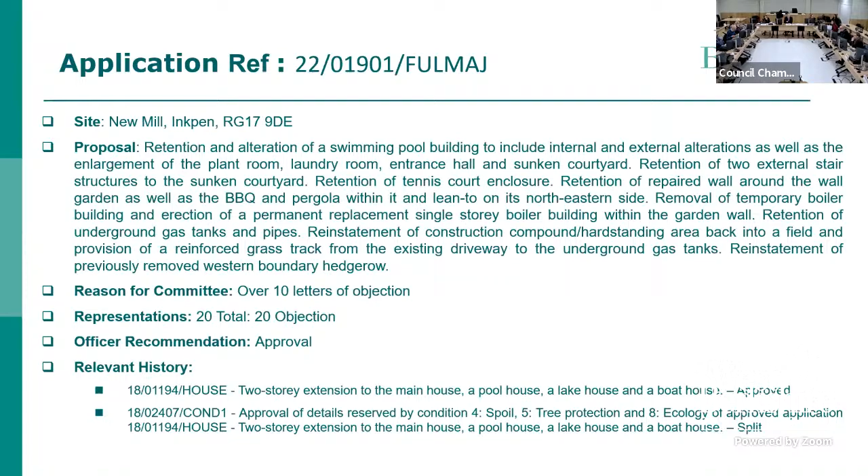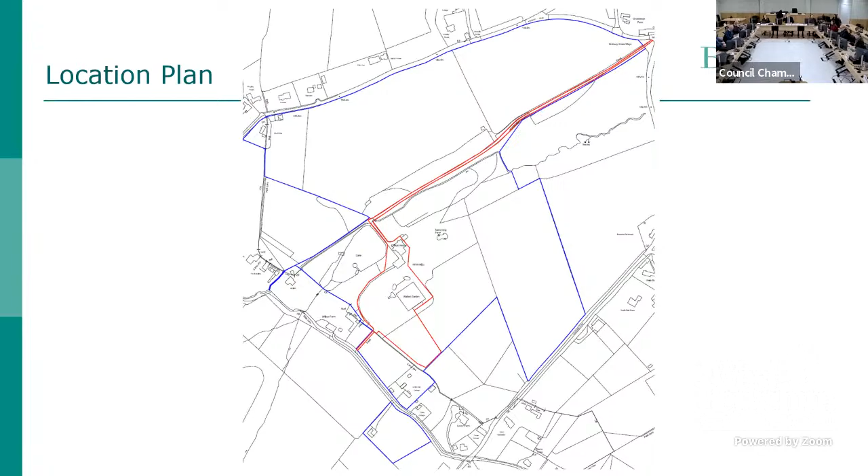I'm going to split it up into sections just so it's a bit easier because it's quite a long proposal. On the screen, we have the location plan from the area. The applicant owns all of everything in the blue line. However, we're only considering the items in the red, which include the access to the north.

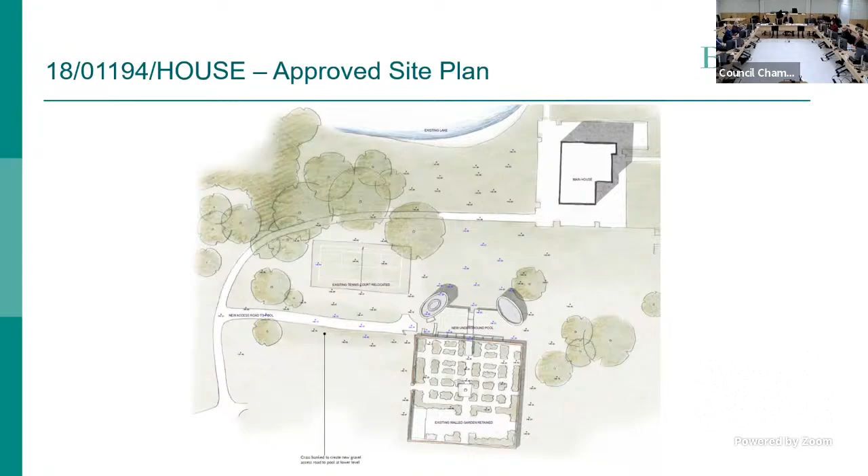This was the superseded site plan. So following concerns raised by neighbouring dwellings regarding ongoing sheet piling works for the access ramp that was previously approved, that's in red, this element was removed due to complaints received about the sheet piling and the noise volume and the issues that causes. This was voluntarily removed by the applicant, and amended plans were received on the 24th of October, which removes the ramp and it remains as is, as a sunken courtyard.

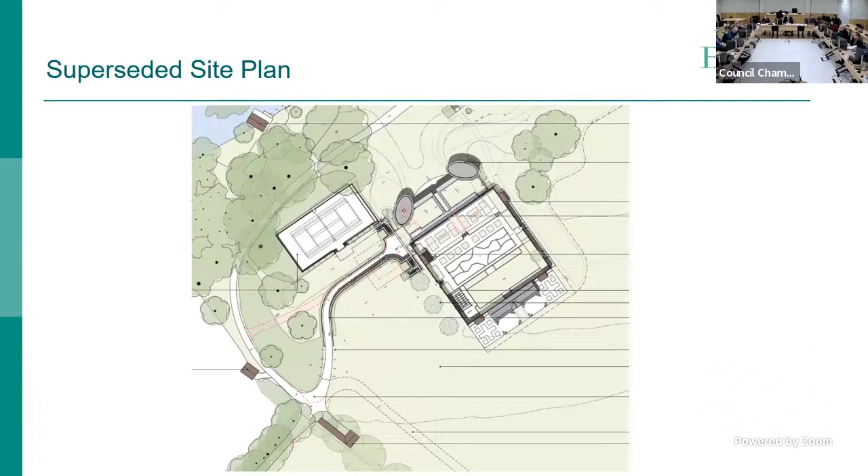So the first element is the retention and alteration of the swimming pool building to include internal and external alterations, as well as the enlargement of the plant room, laundry room, entrance hall, and sunken courtyard. The underground pool building was approved under a previous application. However, changes were made during construction, which this application seeks to regularize. The majority of the plan changes proposed to be retained are reorganizations of the room underneath the walled garden.

These are not visible from anywhere on the site surrounding and result from the enlargement of the total internal area of underground rooms by approximately 10%. This is for increased plant provision.

However, some of the windows from the approved design were not constructed, and therefore this application also seeks approval for them as constructed. Ms. Kirby, does your mouse work on the screen? You might just do a circular movement of the 10% and the increased bit, so other people who might not be quite familiar with reading drawings can follow. Thank you, that's fine.

So the previously approved floor plan is the red, if you can see that online, which is this sort of area. So this area to the right-hand side of the screen, that's all been removed, and the sunken courtyard has been extended for the plant rooms.

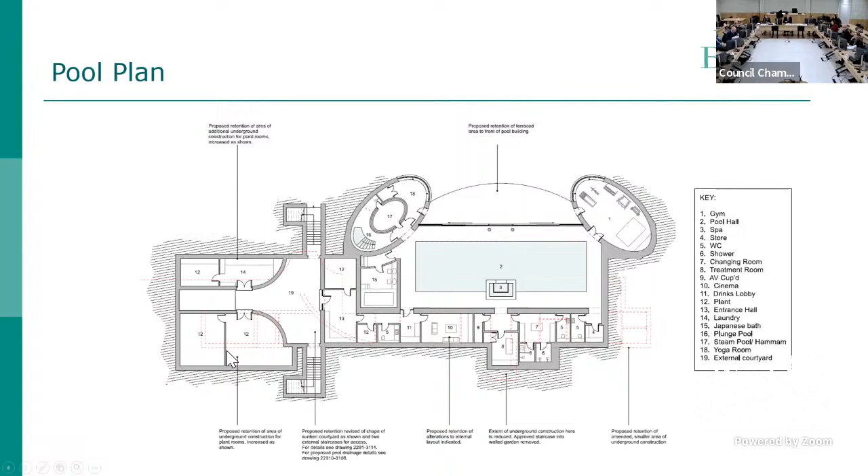So we have some of the elevational changes. This is the main elevation that's seen from the north. Again, some of the windows were not constructed. However, the majority of the plan changes proposed to be retained are internal and again, not visible. The rooms that are visible from the principal elevation are unchanged in size from the original permission. One of the main changes was the removal of the stepped access and glass link into the walled garden, which is situated on the roof.

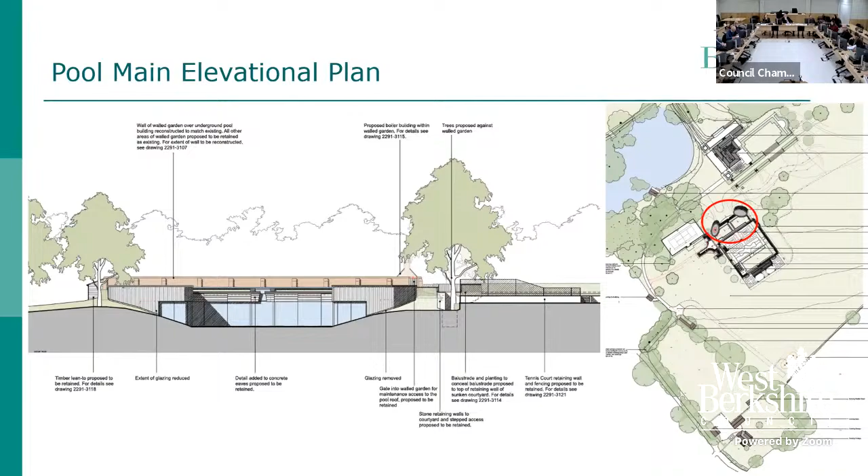So you can see on this plan here. Instead, two external staircases were constructed into the widened sunken courtyard to the west. To the left of the screen, we have a staircase to the north and a staircase to the south. These were constructed. This area here was originally going to be the ramp that goes to the west. However, it's now proposed to be retained as just a courtyard.

So the roof lights in the grass roof of the building are reduced in size and number, and the material finish of the rounded roofs is proposed to be amended from gravel to single ply membrane. There's also a slight level change proposed within the walled garden to allow for increased depth of soil for planting of fruit trees. These are over the proposed underground rooms, to maintain similar planting within the walled garden. So that's within this bottom area out here, that will be the level changes within the walled garden.

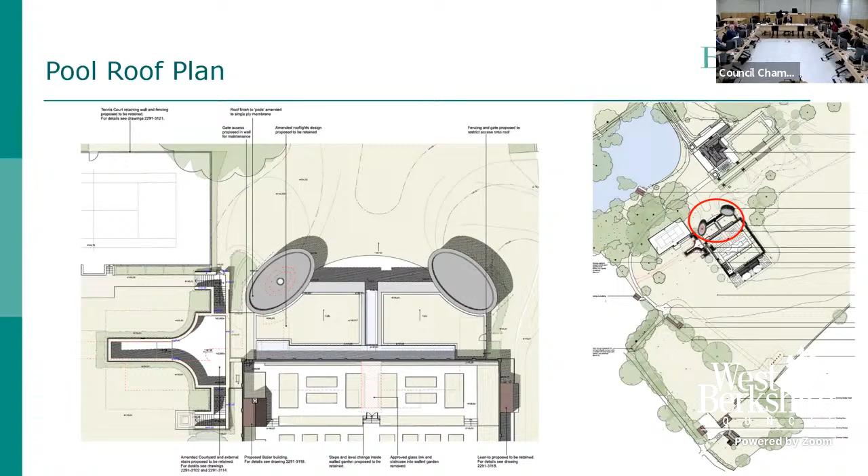The second item on the proposal is retention of two external stair structures to the sunken courtyard - these which I demonstrated here. The sunken courtyard to the west was widened and external staircases were constructed along with retaining walls, which were constructed with associated other works, including cladding of the pool building in timber mirroring the principal elevation.

The retaining walls to the sunken courtyard are rubble stone topped with stone coping. Steel railings have been added for safety reasons, and planting pockets in the walls have been added to soften the retaining walls. The plant rooms are accessed from the sunken courtyard via painted timber doors, and the steel railing balustrades are 1.1 meters in height and screened via planting.

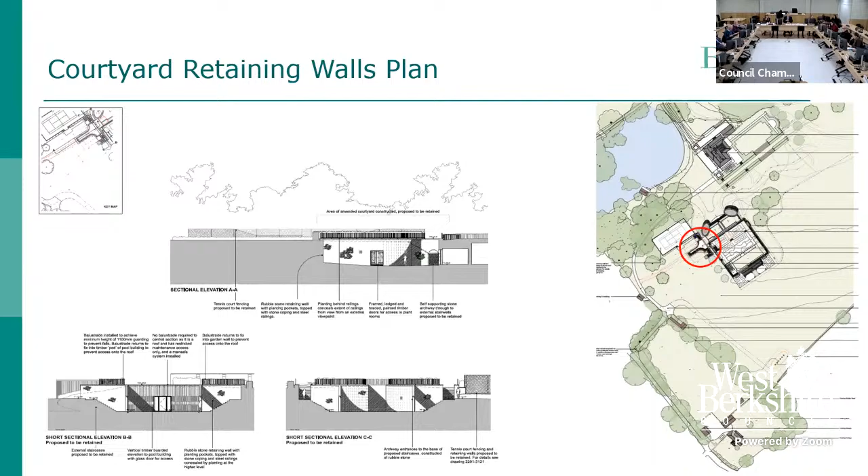The external staircases provide access to the sunken courtyard from the north and the south, as most of the works are below ground. So this is the images of the courtyard as currently built.

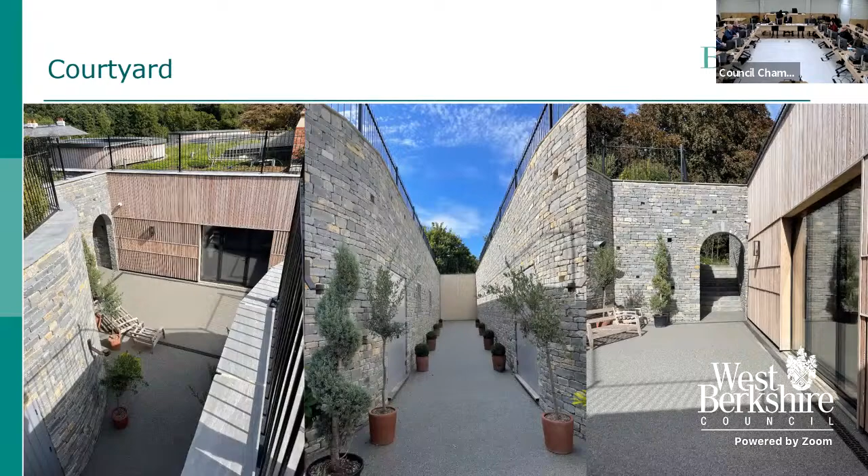The third item on the description is the retention of the tennis court enclosure. The retaining wall and the 2.75 meter high fencing to the tennis court is to be retained. These works are associated with the reconstructed tennis court, which relocated the previous tennis court just a few meters, which was in a similar location.

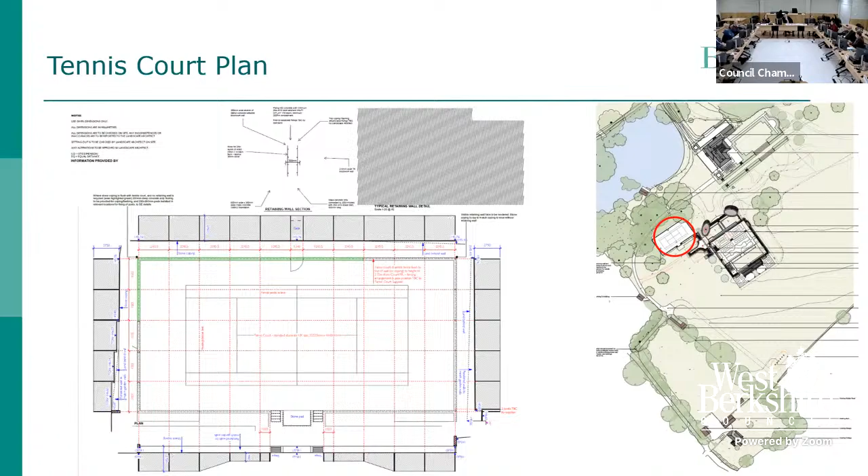So the garden, there was retention and repairing of the walled garden. The proposal includes retention and reconstruction of the walled garden to match the existing. These walls were taken down and rebuilt during construction of the swimming pool building due to instability. The north section of the garden wall was rebuilt as the existing garden wall and therefore has a similar appearance.

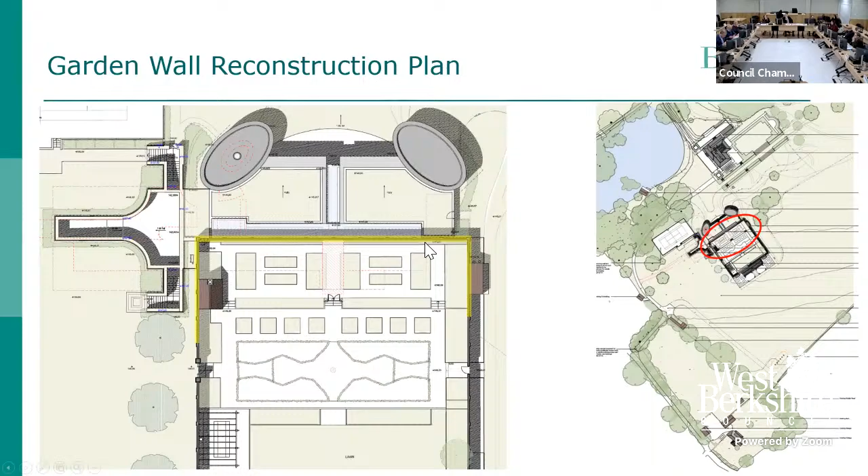On the plan shown on the screen, it's the yellow that has been rebuilt. This is the same height as was previously there.

Item number 5 was the retention of the barbecue and pergola building. This is an already installed outdoor kitchen pergola, barbecue area with chimney. They're located within the walled garden. However, due to the site and the height, etc., they fall within outside general PD rights.

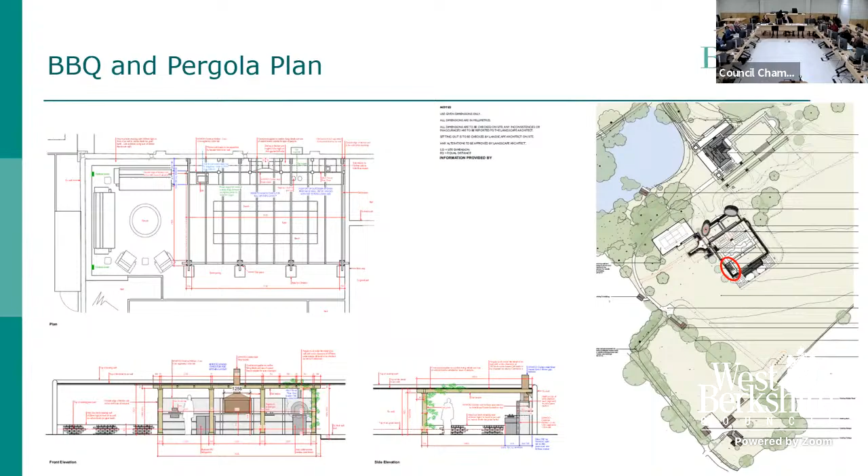The chimney is visible above the walled garden at approximately 500 millimeters. However, given the choice of materials and the positioning, it's not considered to have a large impact outside the walled garden.

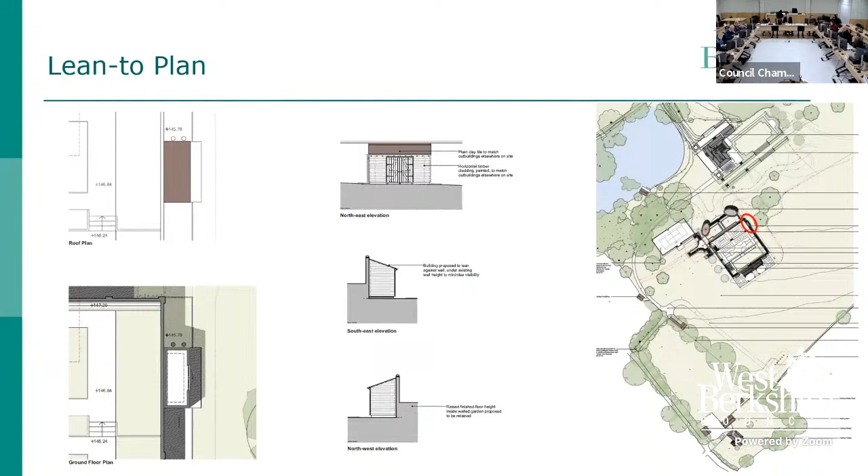Item number 6 was the lean-to. This was a small timber lean-to building located to the northeast elevation of the existing walled garden, to house electrical plant required to run the development. The lean-to is modest in size and smaller in height than the walled garden itself. It's been designed to be in keeping with the existing painted timber gardener's shed already in use in the walled garden. The design consists of a small brick plinth to match the brick of the walled garden, with horizontal painted timber boarding and a tile roof. This has already been constructed on site.

Then we have the removal of the temporary boiler building and erection of a permanent replacement single-story boiler building within the walled garden. The proposed boiler building will replace the existing one and will be more in character with the rural setting of the application site. The building is required to house two boilers above ground, which heat and run the plant rooms supplying both the pool building and the main dwelling. For safety reasons the boilers must be housed above ground, and the proposed boiler house is located within the walled garden to reduce its visual impact on the surrounding area. The clay tile roof will be visible around 1.34 meters above the wall, with the red brick chimney visible another meter above the roof.

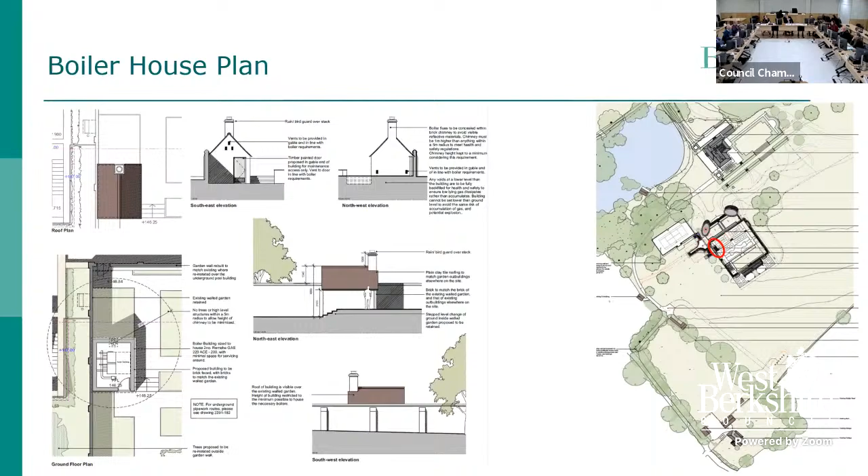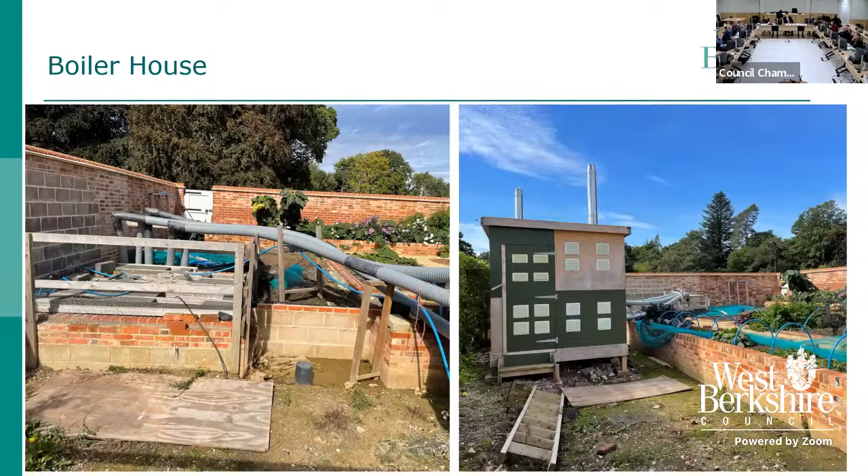We then have the retention of the underground gas tanks and pipes - six 4,600 litre underground gas tanks. They are retrospective and situated to the south of the site. These must be situated 3 meters away from any boundary, buildings and fixed sources. From the gas tank to the main dwelling is a 63 millimeter diameter underground gas supply pipe buried at a depth of 1 meter. The overall depth of the gas tanks underground is 1.95 meters, with only their six caps visible above ground at around 0.2 meters in height, with gravel surrounding. So these are what the gas tanks currently look like.

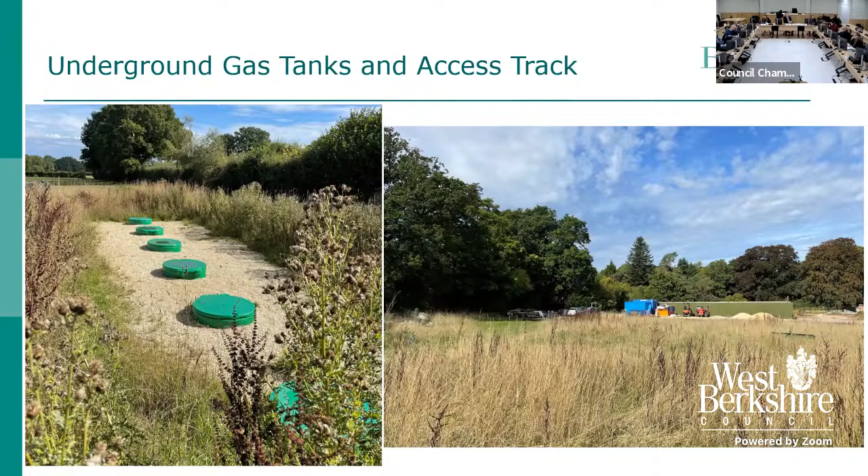There'll also be provision of a reinforced grass track from the existing driveway to the underground gas tanks. The gas tanks will be accessed via the public bridleway located to the west of the site. If you look to the bottom right-hand side of the screen, there's an access there, and this is a public right-of-way along to the south here. The applicant did submit details, and they do have right of access, vehicle right of access along the public right-of-way.

The existing access point to the west of the site will be widened to allow for the turning of the tankers required to attend the gas tanks. This is due to happen a small number of times throughout the year, approximately 3 to 4 times.

However, to the southwest of the site, the access track is proposed to be a reinforced grass track, which allows for reduced soil compaction and the grass to grow over the route, concealing it visually within the meadow, but allowing a stable surface for the tanker to deliver safely to the underground gas tanks. There was a track further closer to the boundary along the west southwest here. However, because these trees have a tree preservation order, the track was advised to be moved further inwards in order to protect the root protection area.

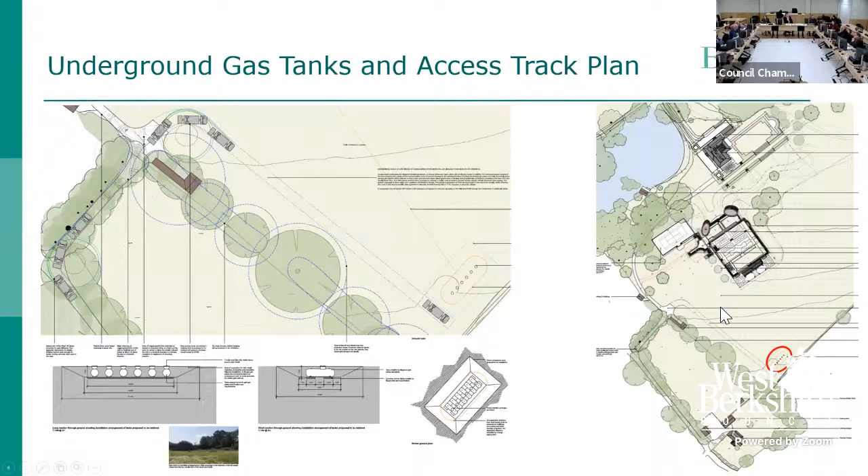Item number 10 was reinstatement of the construction compound hard standing back into a field. This is currently located in this area. The existing field has been used as a compound for contractors and suppliers and is proposed to be returned to agricultural use, most of which has been done, with a small amount remaining as a compound to aid the finishing off of the works at the application site. The current bund, or mound of earth, will cover the area located to the west, and the field will return to meadow. So on the screen, we have the bund that will move onto the area to the west. The construction compound in this photo to the left of the screen has now been removed.

The last item was reinstatement of the previously removed western boundary hedgerow. The boundary between Dearborn and Bridle Path Cottage had been previously cleared to create a gap, linking the boundary of both sites, which are under the same ownership. However, the previously installed access track through Bridle Path Cottage paddock has now been removed, and the plan shows the gap between the two dwellings is to be reinstated with native hedgerow to restore the separation relationship. When we went on the committee site visit, this had already been carried out, however it will take a number of years to fully establish.

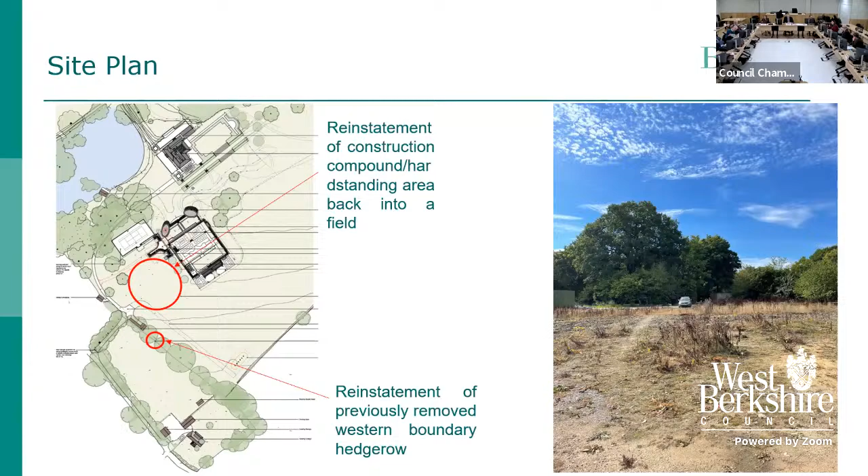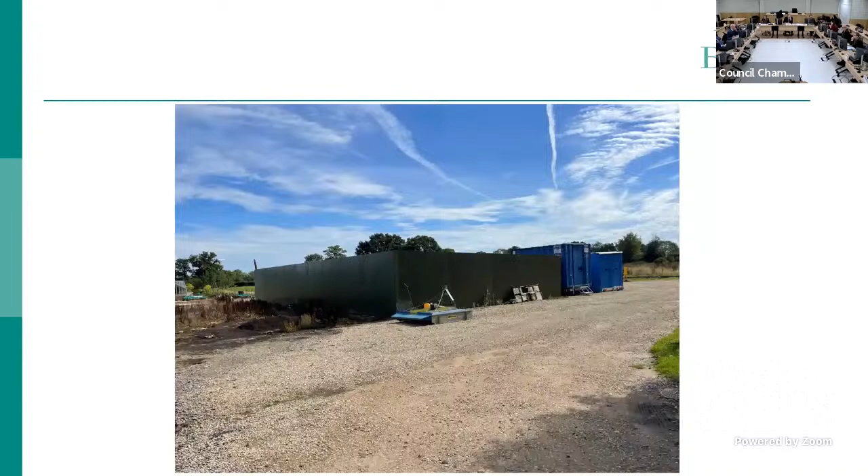Here on the screen are photos of the area currently used as a compound, which is to be reinstated as meadow. This has now been removed and was not visible on site.

And that's it, Chairman, thank you for that, Ms. Kirby. I'm sure there will be some questions for you later on. Now we move on to Mr. Goddard, our highways engineer. Mr. Goddard, any observations regarding highways on this application, and in particular anything on the content of the construction management plan?

Thank you, Chairman. All the construction activity and all the buildings subject to this planning application are quite some distance from the public highway, and therefore the local highway authority raises no objection.

But as the chairman has mentioned, some concern has been expressed by local people regarding construction traffic. This has been looked at in some detail on this occasion and is secured by condition 3 of your main report. The construction management plan dictates that all, or most, construction traffic will go via the main entrance from the north via Pebble Hill.